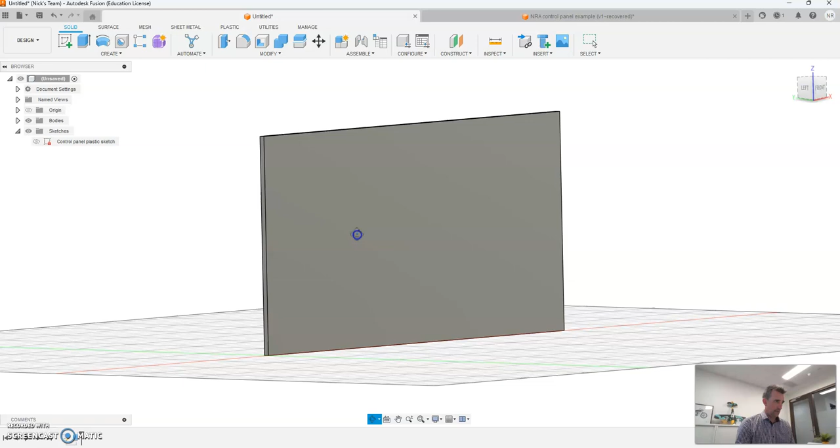So what I'm looking at is the panel that we did in the last tutorial. You can see that it's that same piece of plastic, 250 by 125 millimeters, extruded 3 millimeters. You can see that flat sheet of plastic. It's very similar to if you went into the workshop and cut a piece of plastic on the bandsaw and you just have this piece of stock.

Now what we're going to do is imagine we're doing the same sort of thing in Fusion as we would do with a drill. So we're going to drill some holes into this and remove some material from it, and that will give us our mounting points for those things I just talked about.

The way you do that is through more sketches. Like every sketch, it needs to sit on a surface somewhere. So what I usually do is just pick the surface that makes the most sense. In this case, I'm in the front view, you can see with our view cube, and I'm just picking on this front surface here, then going to create sketch.

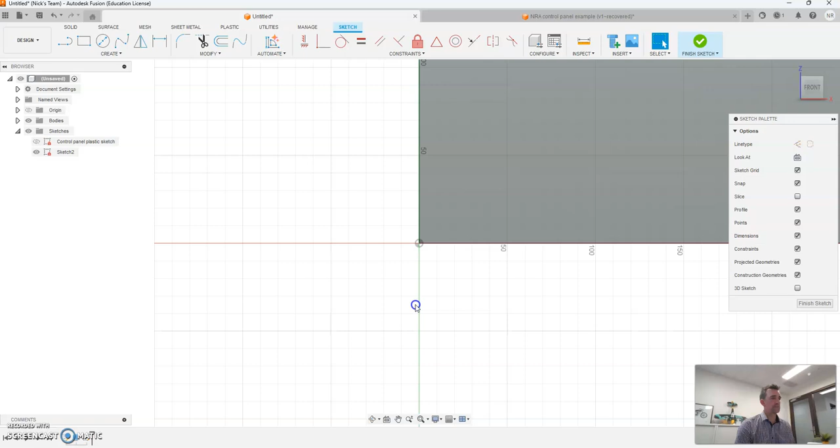Okay, so it'll flick me into the sketch environment. It'll actually shift my view around, which is annoying, so I'm just going to pull it back with the pan tool. I'm going to hit escape to get out of the pan tool, and this is my sketch. It's on this surface of the control panel, and it doesn't have any geometry in it at the moment, but I have to draw those things myself.

So what I'm going to do is a series of holes here. I'm going to do those using the center diameter circle tool. It's in my sketch tools panel, there it is. The center diameter circle builds you a circle that looks precisely like what the name says - from the center to the diameter, the outside if you like.

I'm just going to randomly put 3 circles into my part. But look at this - I'm actually making sure they line up horizontally. The way I'm doing that is I hover over the center of my first circle and then just drag out, and you can see this blue dotted line - that's locking the centers of my circles onto the same horizontal edge. So when I do my next circle, you can see they're beautifully in line, and I keep going, drawing my third circle like that.

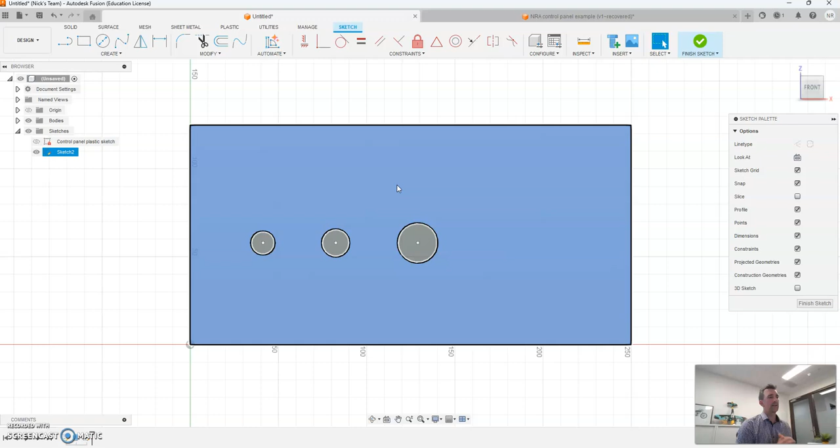Okay, I'm going to hit escape to get out of the circle tool. My circles are basically all lined up now, so if I try to move one, I can move it and break that connection. But what I want to do is just lock them together. So if I lock the center to the center, you can see that they all line up, and Fusion will remember that. It will remember when I start adding dimensions that I drew them like that and wanted them to stay lined up, so it won't mess around with that for me.

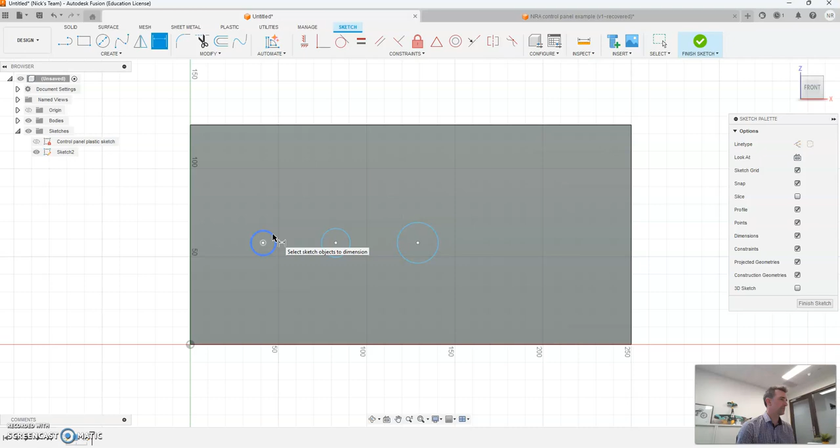But when I draw circles, one of the big things you have to do is give them a size. That's the sketch tool as well, the same tool we used last time. I'm going to go for sketch dimension and pick the edge of the circle, drag my dimension out, and then just lock it down.

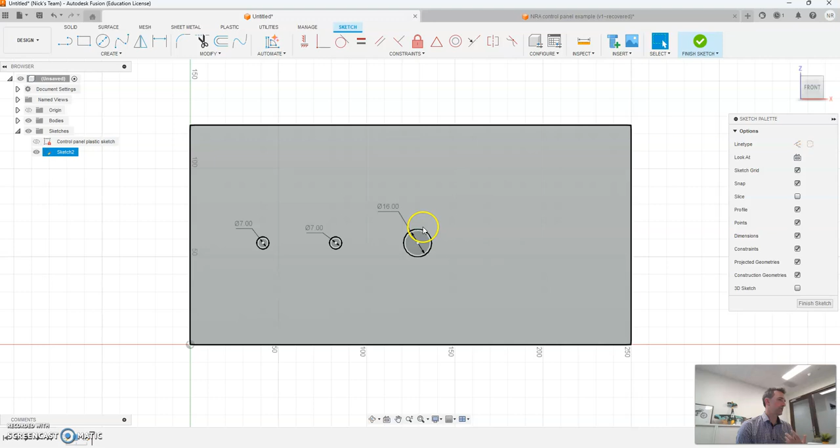Now this one is going to be 7 millimeters, so it's reasonably small. I'm going to do this with the second hole as well and make that 7. And then I'm going to make my third hole 16 - the reason that one's different is because this is the switch. Now, I don't personally mind whether you put the switch there or whether you put it sort of here or up here or out here, that's fine.

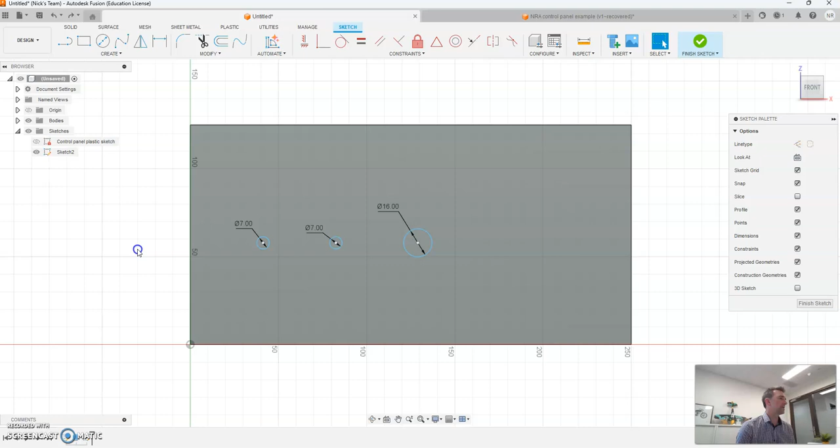But whatever you choose to do, just keep in mind that it needs to make logical sense with the design that you want, the one that you drew on your design sheet. So you probably have an arrangement fairly similar to this, which is great. But you probably also had some sort of dimension on that to give it a location.

Or how far apart the holes were, right? So if I use my dimension tool again, what I'm going to do is say, the center of my first circle, I want it to be a certain distance away from the left-hand edge, okay?

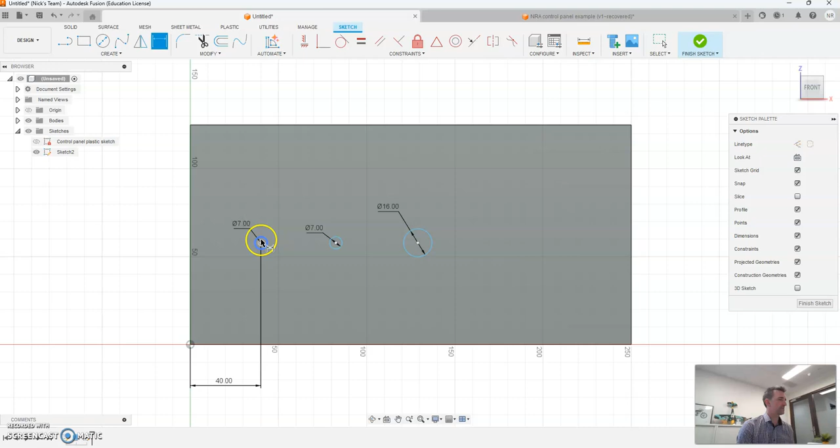And in my case, I'm going to say my design has 40 millimeters. It's going to put that at a set distance. And then I'm going to say, now the next thing is the center of this hole to the center of the next hole. I also want that to be 40 millimeters. So I'm going to readjust that number and get them a bit more consistent. And lo and behold, the third one is going to be the same, I'm going to make that 40 as well.

So I'm going through and just getting some real consistency in the gaps that I've got between my holes and how far they are from the edge. And I've got this nice sort of lineup of 40 millimeter dimensions across the bottom edge, which gives me those gaps.

Now I'm almost there with these holes. The last thing I probably want to do is make sure that they're actually set at the right height as well. So what I can do is put a dimension from the center of the first hole to the top edge, and put in that number as well.

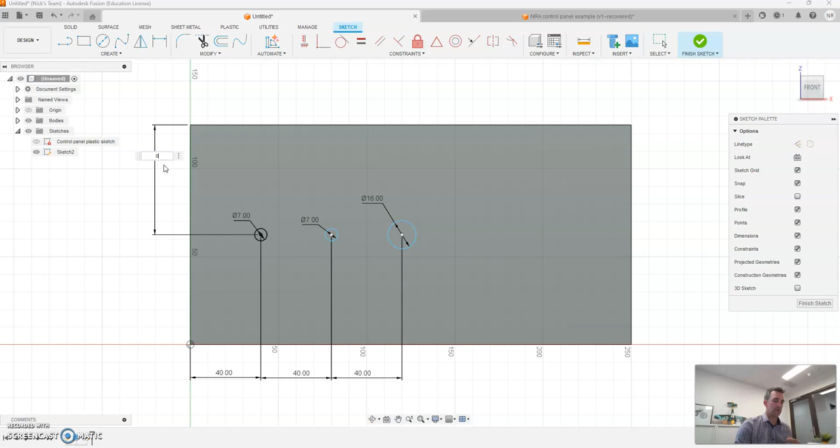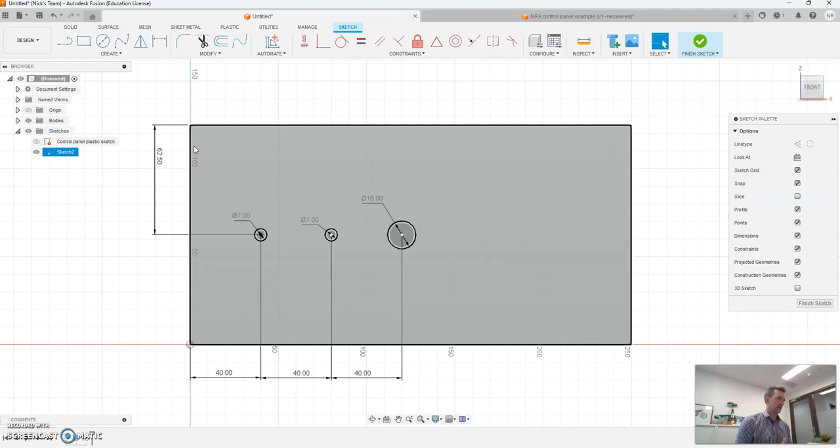The interesting thing is you can see that because of the way I drew these, they were all kind of locked together horizontally. If I start changing this number, you can see they all shift together because they were all drawn that way. So it's a good habit to get into, drawing things well the first time, because then when you put dimensions in, it doesn't break apart your model and make it look really bad. So that's fine.

Now, in theory, that's all ready to go, but you've noticed something strange about this: this hole has now become black, whereas these two are still blue. That's because while I drew them to be lined up together, they aren't actually permanently locked there, so I can actually break it up, which is kind of not brilliant.

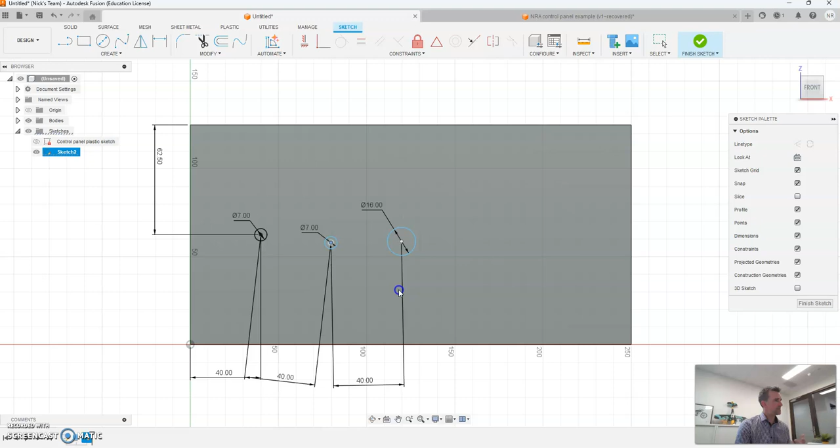So what I probably want to do is just go through and add more dimensions, okay? So I want to go for a 62.5 there as well and lock that one down. Yes, I'm happy with that. And my last one, I'm going to lock that one as well. And you can see that in that way, I've got all my circles locked.

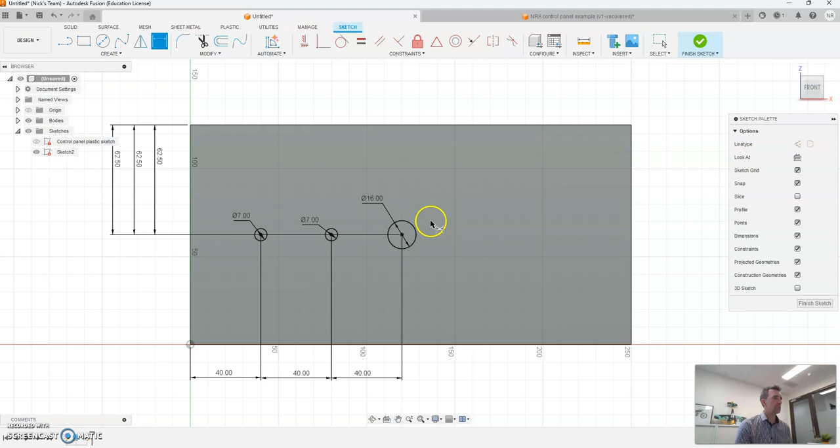If I try to grab these now, there's no way it's going to move. It's actually locked in place. And that's what we call a fully constrained sketch. It's a sketch that doesn't have any question marks about it. Everything's in exactly the right spot, and we're happy with their position, okay?

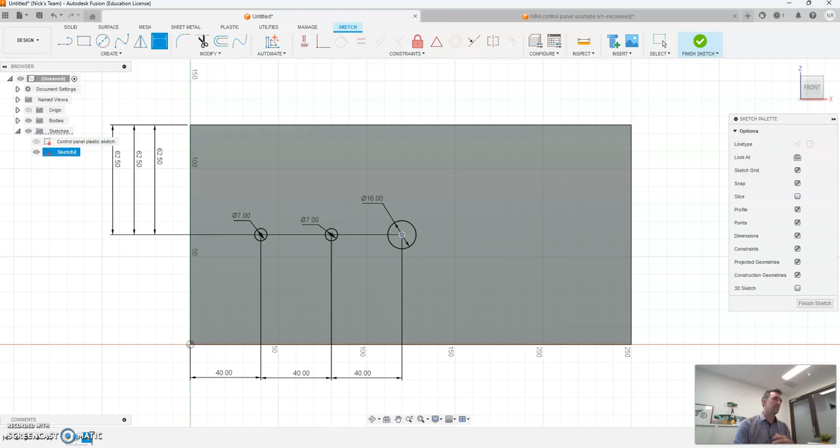So on that, I think I'm pretty happy with what's in this sketch. I don't feel the need to keep going crazy and adding more features and holes and stuff. So I'm actually just going to stop there and say finish sketch, right? And that's what my part looks like now. It's a piece of plastic with some drawings on it. They're not actually holes yet, right? They're just the sketch that I would use to make a hole.

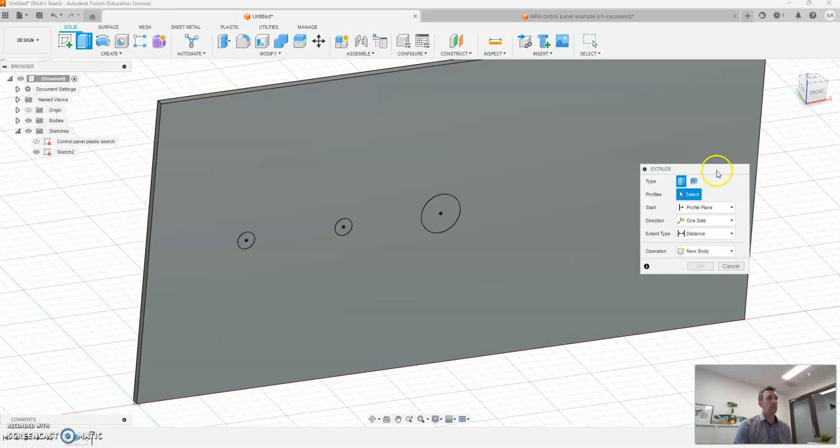So what I want to do now is go to my extrude tool, my old friend. I want to do some different things with this. So the first thing I want to do is pick the profiles, the inside of the circles that I want to extrude, right? Then I want to go for a distance.

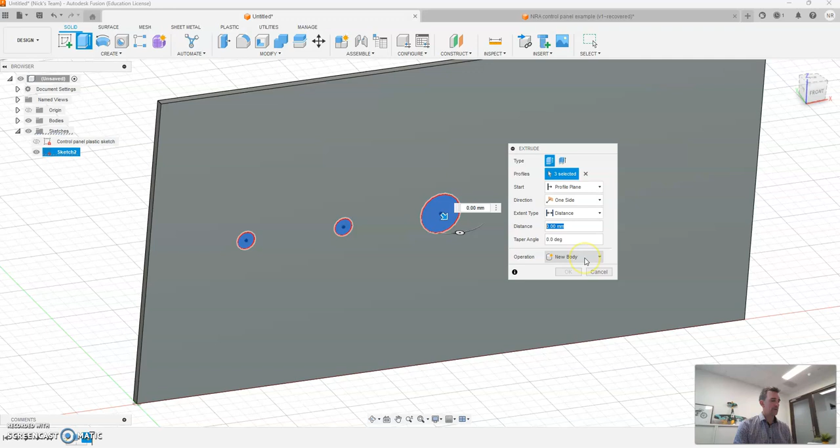Now what I want to do is go 3 millimeters into the part. If I just type in 3, it's going to go the wrong way - you can see it's going away from the part rather than towards it. I can simply change that by making it -3, and now it's going the other way.

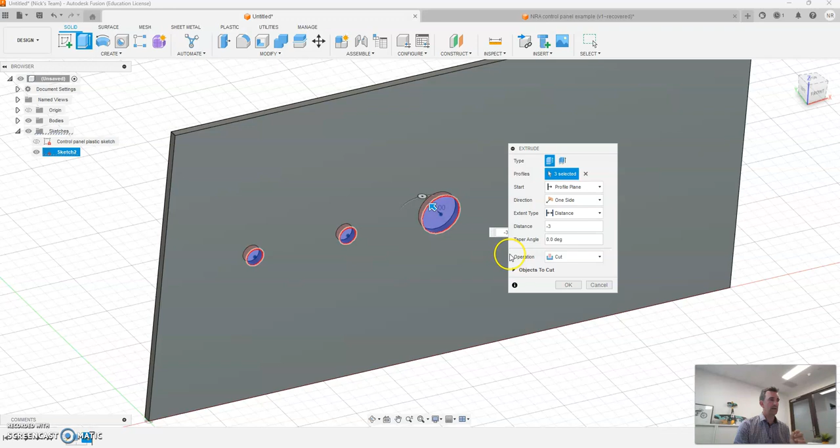The moment I did that, it said, okay, I can tell you're trying to cut - see how this operation just changed to cut? You've got a few options here. If you remember, last time we had new body selected, this time I'm cutting it, and that's taking material away.

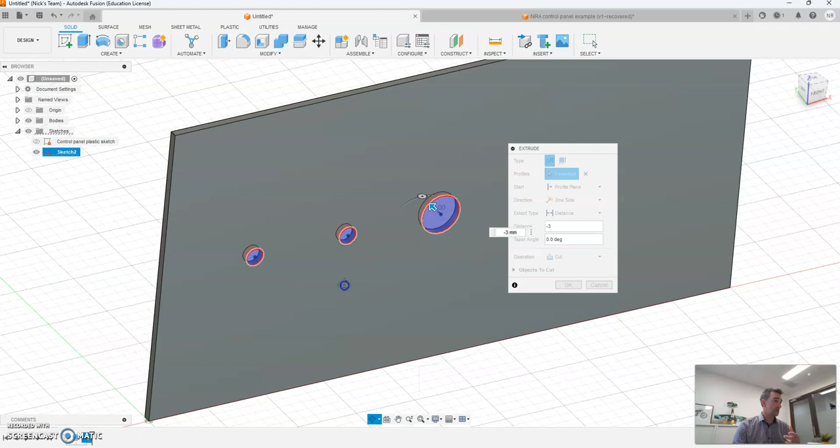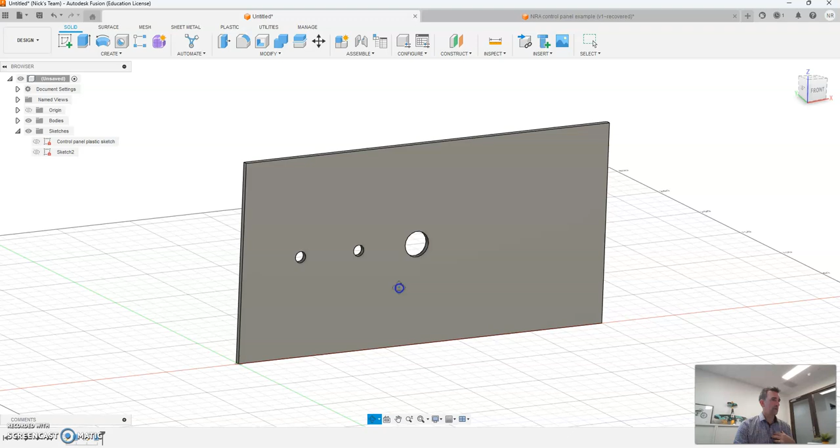So the preview looks good to me, it looks like it's going to bring a result, I'm pretty happy with that. I'm going to say that's fine, let's go okay and see what we get. So now I've got my holes for my volume control, my input, and my switch set up in this part, and those cuts are ready to go. That's a very simple cut extrude.

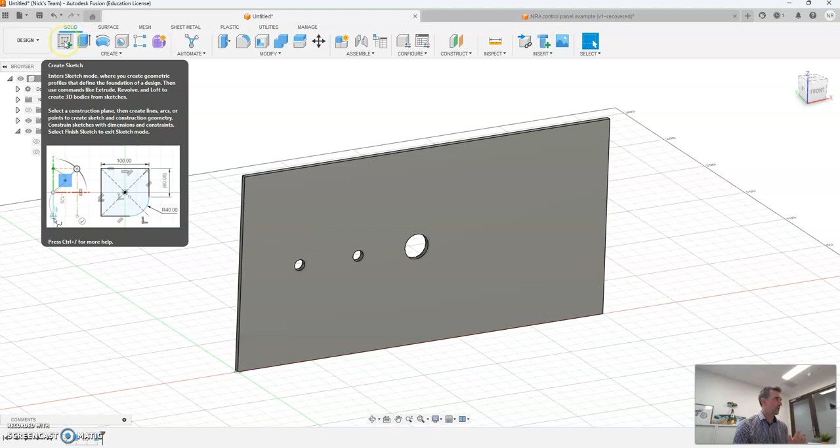It actually sets this control panel up with some really nicely controlled dimensions and the cuts at the appropriate size. Really quickly folks, since it's a 10-minute video, I'm going to do the holes around the outside for the mounting screws as well. I'm not going to talk much about this - I'm just going to roll through it so you can see how quickly it can happen when you're a bit more fluent with Fusion.

So what I'm going to do is draw these holes like this. You can see my little blue line-up points, so I'm getting everything lined up. Perfect, okay, so those are the 4 drill holes. I'm just chucking my dimensions on now.

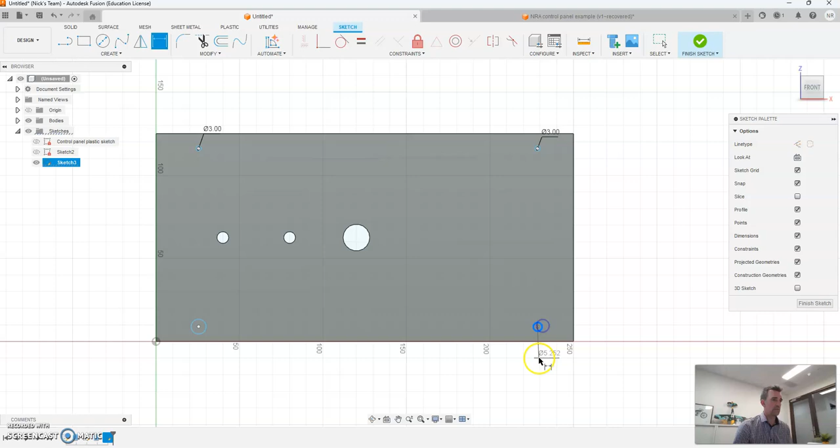I'm making that 3 millimeters, I'm making this one 3, I'm making this one 3, and I'm making this one 3. Great, okay, and I'm just going to lock some heights and things in as well.

You can see my holes have got pretty small, but what I'm going to do is gap this. Now I know it's going into a 19 millimeter piece of timber, so in theory halfway down is about 9.5 - so that's great. I'm just going to start putting those numbers in.

Unfortunately with 4 holes I have to do this 4 times for everything, but that's okay. Wouldn't be the first time I've had to do some repetitive CAD in my life.

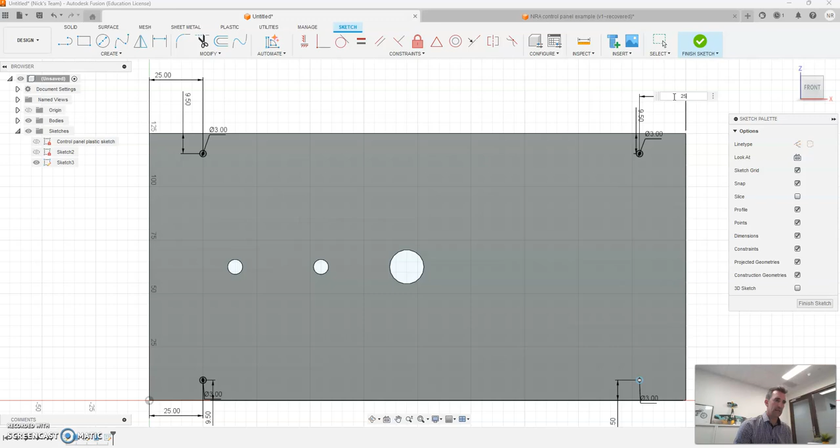With this side I'm actually going to make that a bit bigger, so I'm going to make it 25. Now if you've got your wits about you, you're thinking, hang on, why is he making this one 25 so the holes aren't exactly in the corner? Which is a really clever question, and it's related to the way we built that wooden box. If you remember, it had a joint right on the corner, and I'm just trying to drill my holes inboard a little bit so I'm not hitting the actual joint line, which would be bad. Hopefully that makes sense.

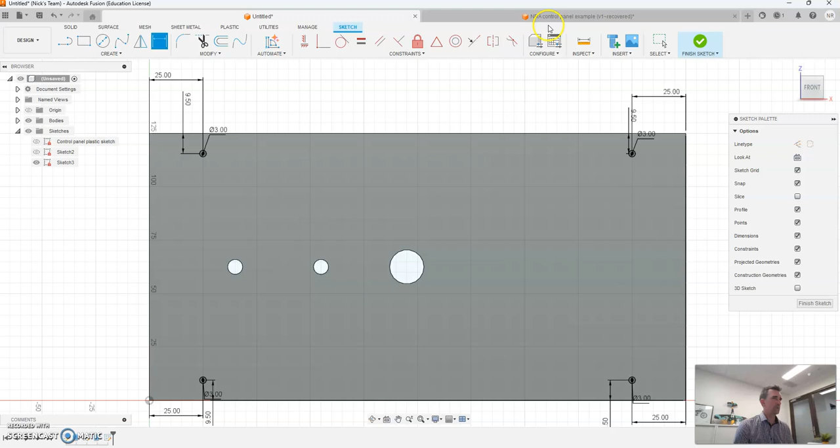So cool, those are my 4 circles for my drill holes. That happened pretty quickly - you might take a bit longer, but that's okay. And you can see that like before, I've got my sketches, but I don't have my extrudes yet.

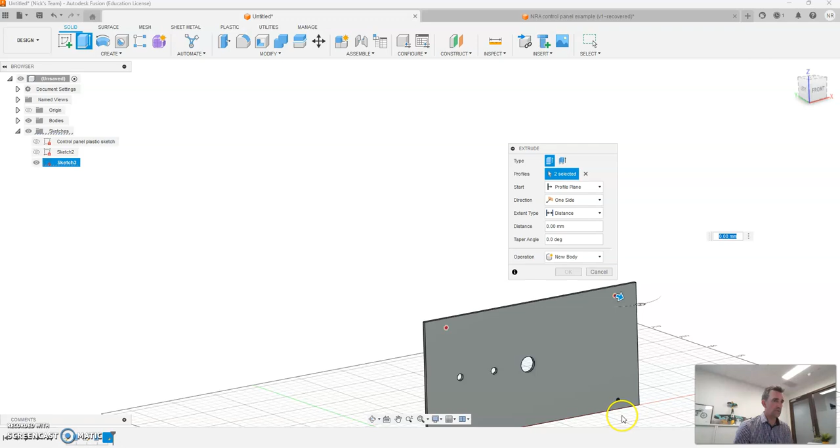So I'm going to extrude. I'm going to go profiles, zoom in a bit - that's 1, okay that is 2, okay that is 3, and my last one's over here, and that is 4. I'm going to put my distance in as -3. It's going to figure out that I want to cut, and then I'm going OK.

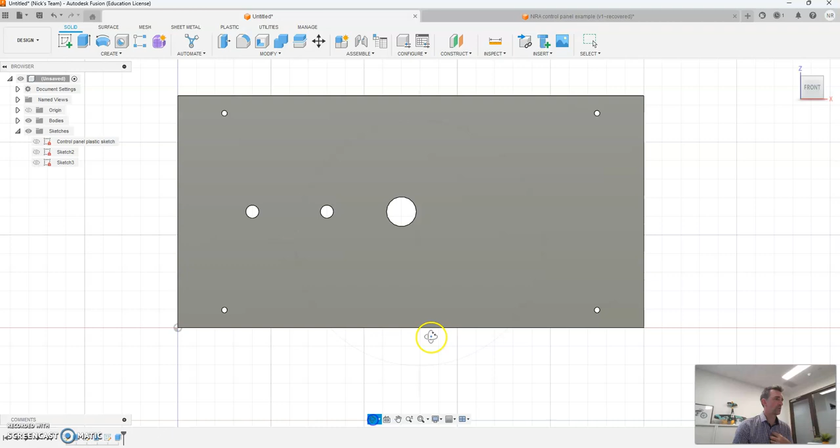Alright, so very quickly, that's how quickly it can go if you know what you're doing and you're pretty fluent with the program. So I've got my 4 drilled holes, my volume control, my input control, my switch, and the next tutorial is going to walk you through how to do a pattern for a grill so you can make that speaker make noise really well. Hopefully your model looks a little bit like this.